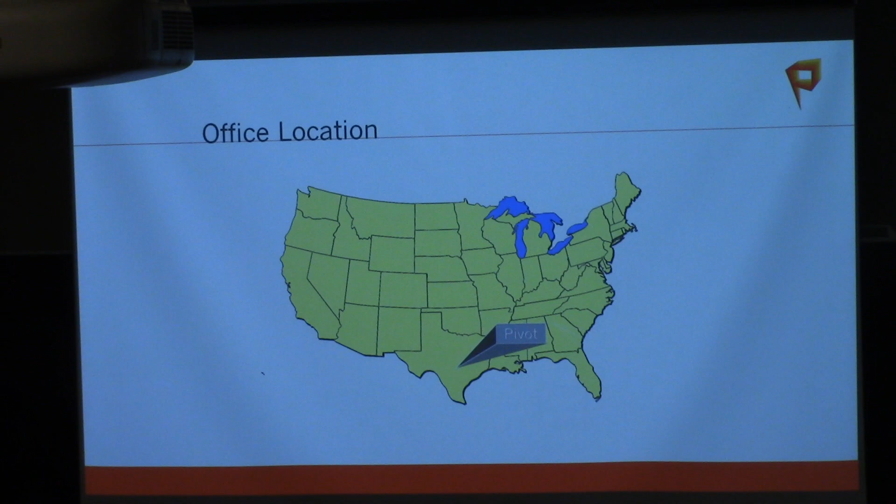Most people that know me know I do a lot in structural concrete, and I'm actually not going to talk about much concrete today. There will be a little bit on concrete, but given the work that I do as a consultant, I get involved in a lot of different things, some very interesting things, and I thought this one might be of interest to you. First, I want to give you a little bit of background about Pivot Engineers. It's a small firm. We have 13 individuals. Half of them are PhDs, the other half have master's degrees. We're located in Austin, Texas.

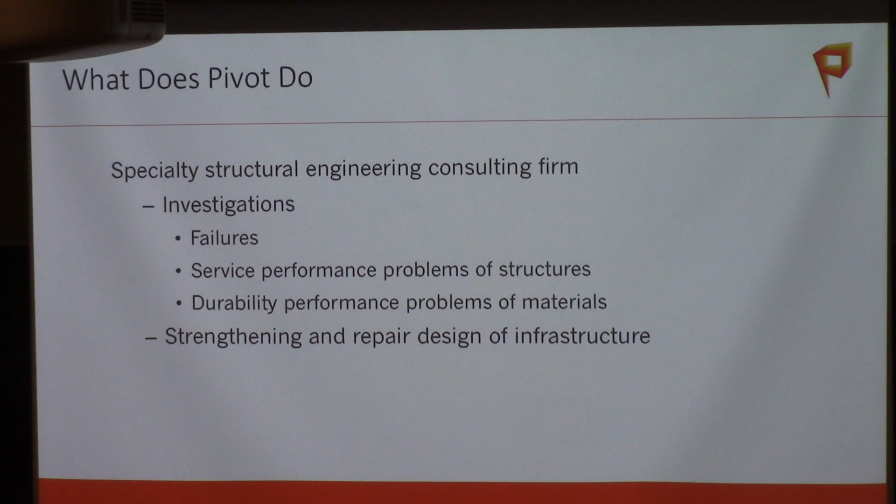I've been fortunate over my career to work in most states. I need to work on the upper Midwest here a little bit, as you can tell. Had a few projects outside the continental U.S., including Alaska and Hawaii, and done work in Honduras and in the Caribbean. We're a specialty consulting engineering firm, mainly doing two different types of work. One, investigations, looking at structural failures, performance problems with various types of structures, buildings, bridges, infrastructure of all types, durability. And one of my favorite opportunities in work is actually strengthening and repair design of infrastructure. That's the type of work that I enjoy best.

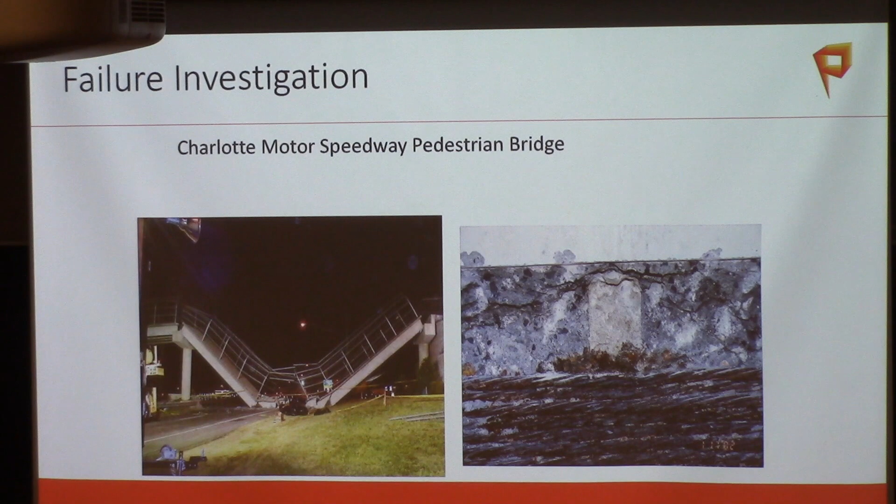In terms of failure investigations, this was a pedestrian bridge collapse at Charlotte Motor Speedway. 114 people were on that bridge when it collapsed, and it was unfortunate. It was all caused by a simple little detail at the precast yard where they filled the plug with chloride-laden grout, and you can imagine what chlorides do to pre-stressing strands. On that fateful night, luckily no one was killed, but some were seriously injured.

I got involved with TxDOT a number of years ago. I'm certainly not a vibration specialist, but we got involved in some cable stay bridges. There's two in TxDOT that both had what's referred to as rain vibration issues. When you see something like this, the first thing that comes to mind is fatigue of the pre-stressing strand that makes up the cable stay. And you can see it looks like, as I refer to it, a wet spaghetti noodle,

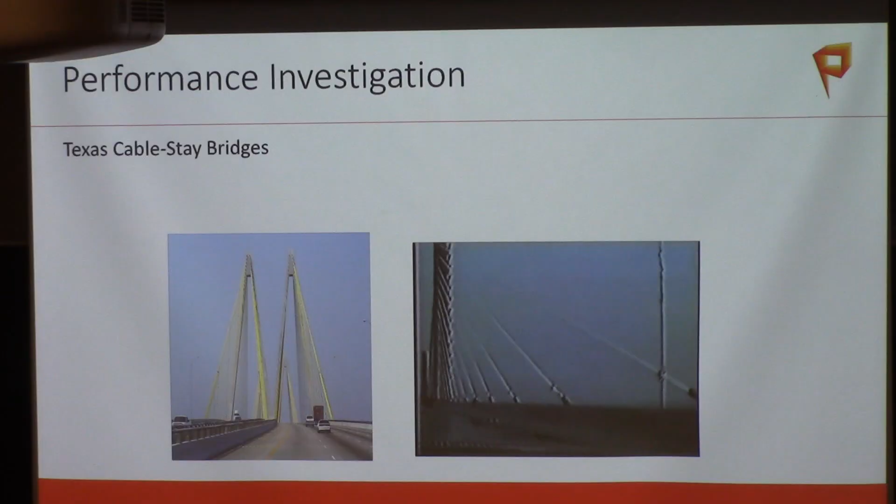the technical term. And that mechanism is hard to imagine, but when it rains and there's a light wind, it forms a rivulet, a little stream of water. You can physically see it, and that's enough to create asymmetry when the wind blows, and you get the vibration transfers from the wind.

Interestingly, as you can probably figure out, it's only a certain wind. If it winds very heavy, it blows the rivulet off, so you don't get vibration. So it's a very certain set of wind conditions where that occurs.

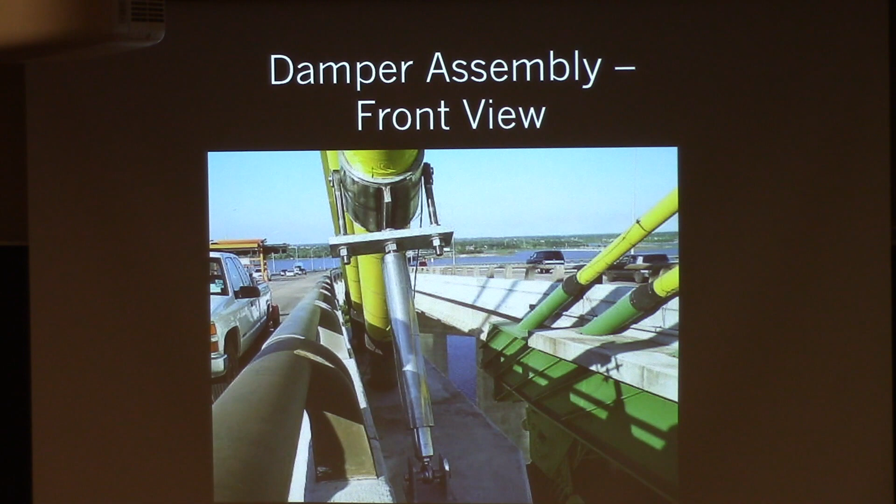We designed some dampers, we had a prototype damper. This is the final installation, which was in a very harsh environment in the Baytown refinery area outside Houston, so it's all stainless steel. This gives you an idea of the effect of the dampers, which was to reduce the vibration.

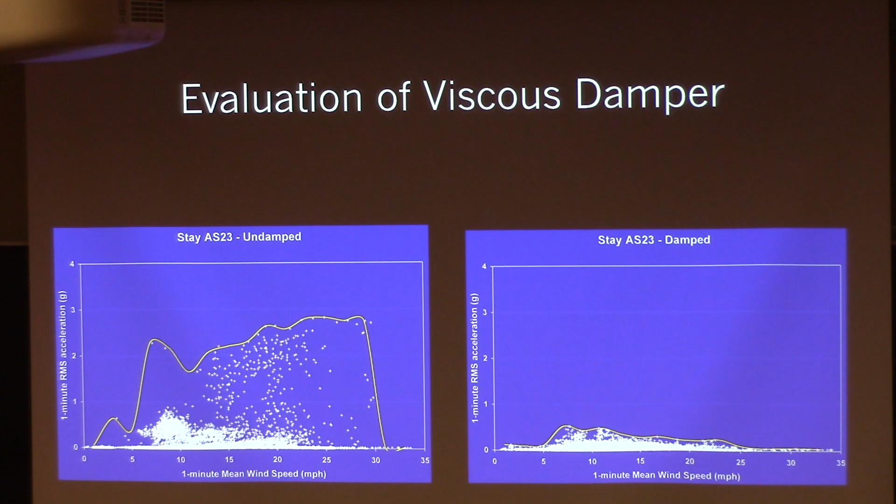We recently completed two bridges in Georgia. Both of them experience rain vibrations, have been in existence for 20 years, and they're doing the same thing. We're retrofitting them with dampers.

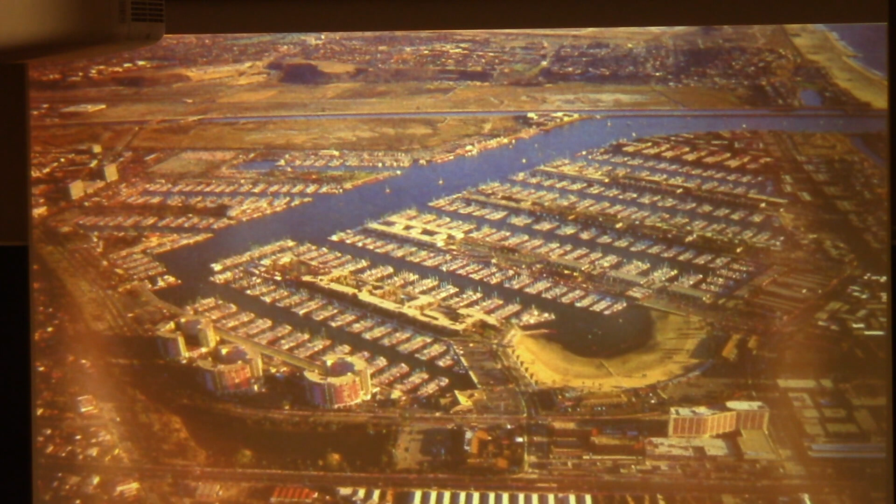This is one of my favorite projects of my career, quite old, done back in the mid to late 90s. It's the Marina del Rey seawall. It's a very simple structure, built in the late 1950s by the Corps of Engineers.

It started having corrosion problems along the joint. As you can imagine, in a marina, the water tide fluctuations twice a day ate at the reinforcing steel, creating corrosion problems. They started having collapses of this wall.

In the meantime, there's a lot of infrastructure, as you saw in the picture of Marina del Rey. Interestingly, LA County actually owns the land, and they rent it to people on long-term leases. It was very difficult to try to visualize something on the inside because of all the boats.

So we went with caissons that are really just vertical bending members and tie rods that were sunk through the back. We did a fair bit of non-destructive testing in order to locate where there was corrosion damage, mainly delaminations on the backside of the wall.

We were able to locate those and save about $25 million by doing the non-destructive work. We were able to tune or customize each of the wall panels depending on the amount of damage.

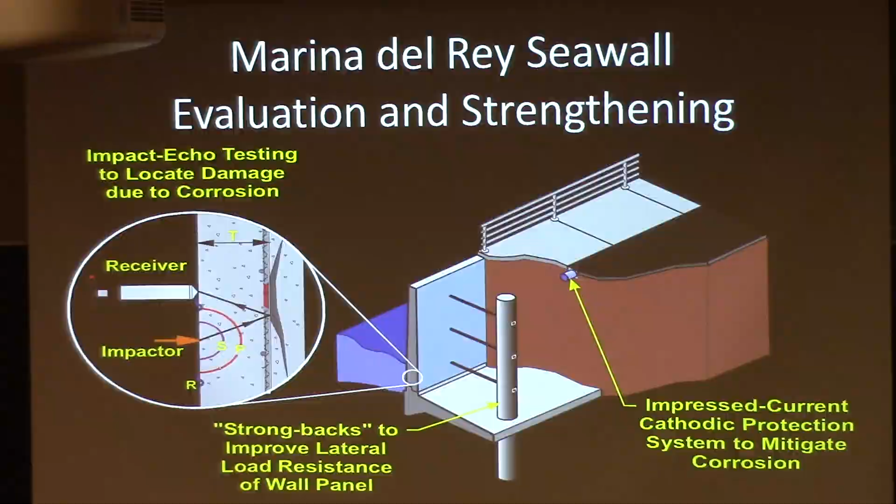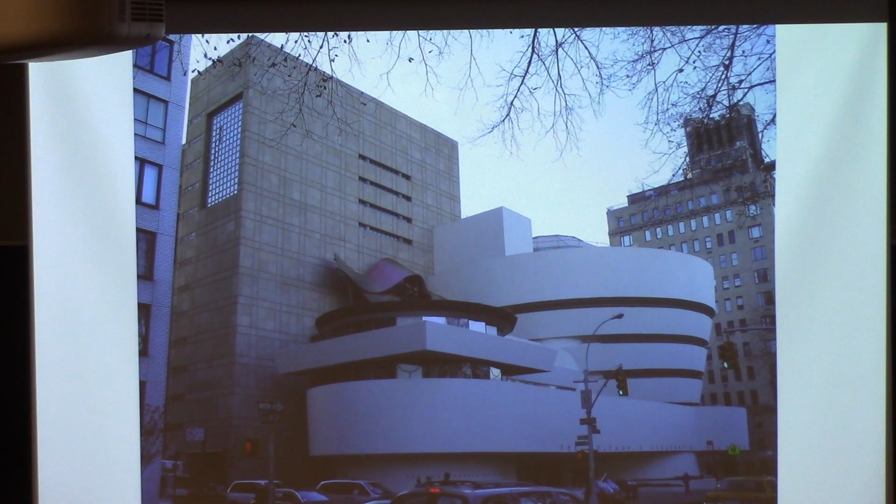Of course, Frank Lloyd Wright has a lot of ties to Indiana, with his architecture in Bloomington and other cities and towns across the state. You can see some of the problems it was having over the 50-plus years it had been in existence.

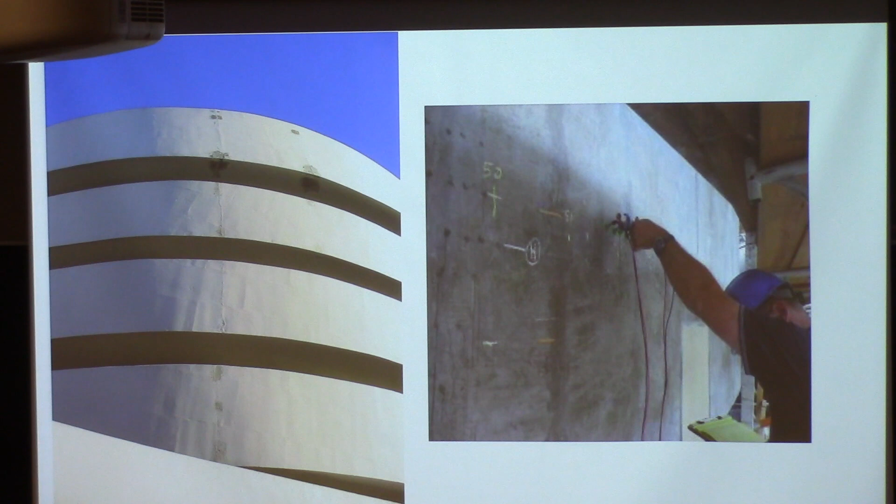We did some non-destructive testing, figured out where the corrosion was occurring and what we needed to do to mitigate future corrosion, and it went through a very extensive restoration process.

That's where the residents get to go walk their dogs — they don't want to take them outside, so they take them to the terrace on the 10th floor. A piece of concrete about 60 pounds fell and exploded next to one of the maintenance people for the building.

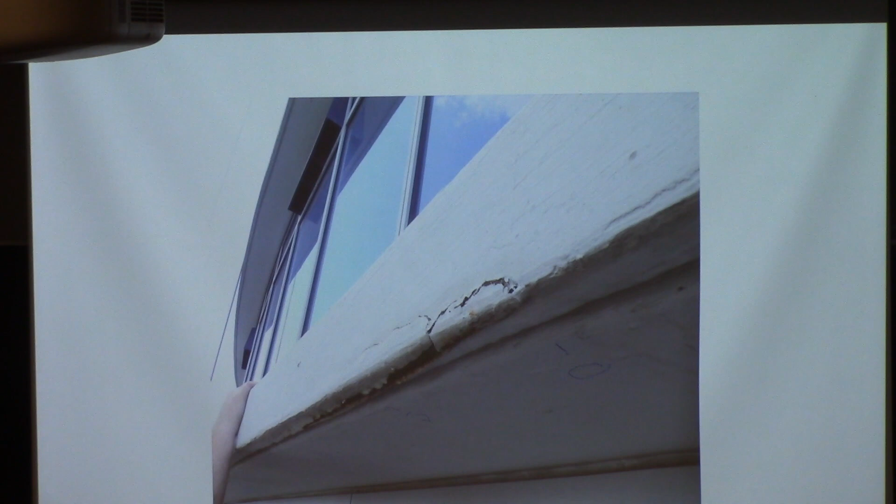It was 6 years old when it was first discovered; it's 9 years old now. We went through an extensive investigation and corrosion investigation process, and it was all in the detail.

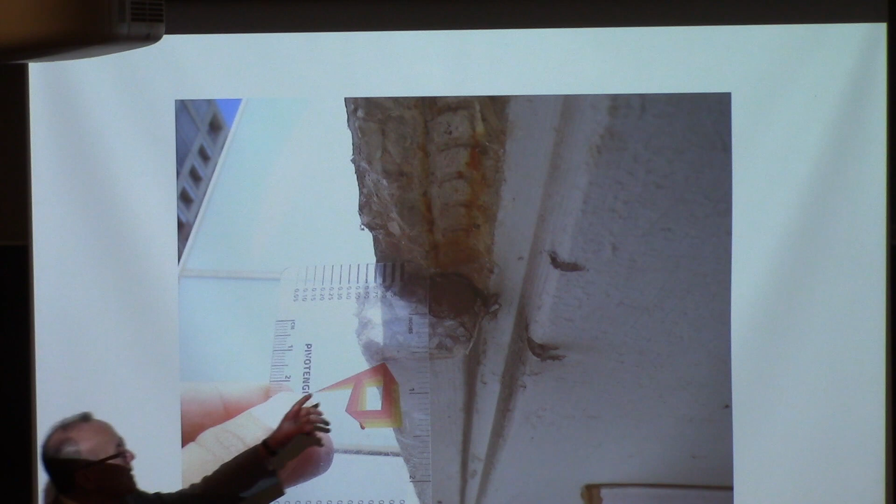A reinforcing bar, you can see here, was placed at this edge near a drip edge, and there are no salts anywhere nearby. It was carbonation corrosion, and it occurred within Austin, Texas — what I consider a very mild environment.

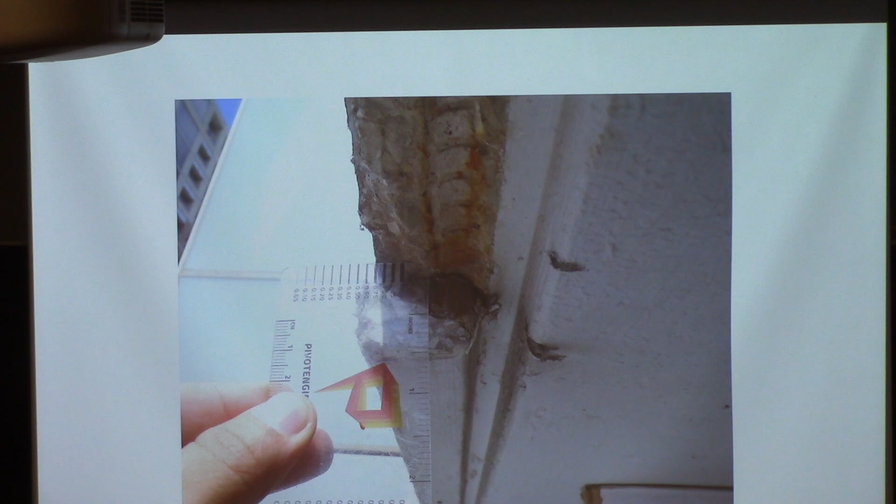Then we're retrofitting it, extending the slab edge out by 2 inches from what it originally was, using GFRP bars, an inert fiber reinforced plastic. You can see what the repair looks like once it's finished.

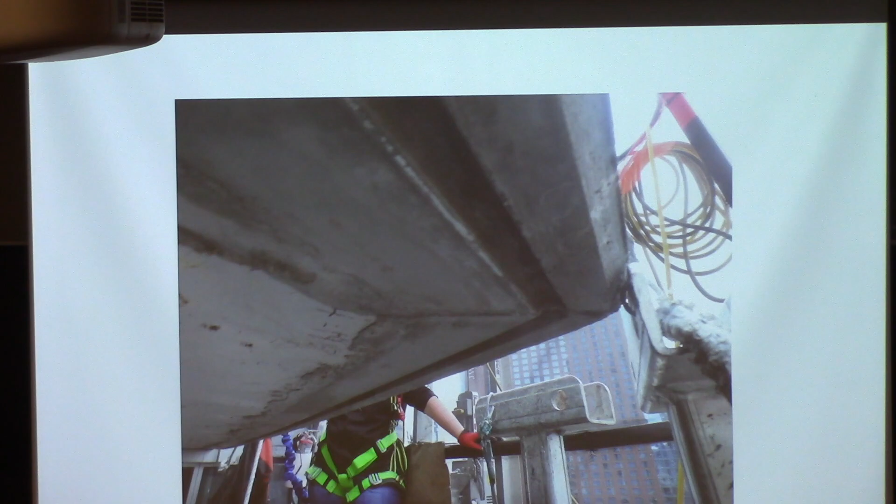So that's a little bit about our background, the type of work we do.

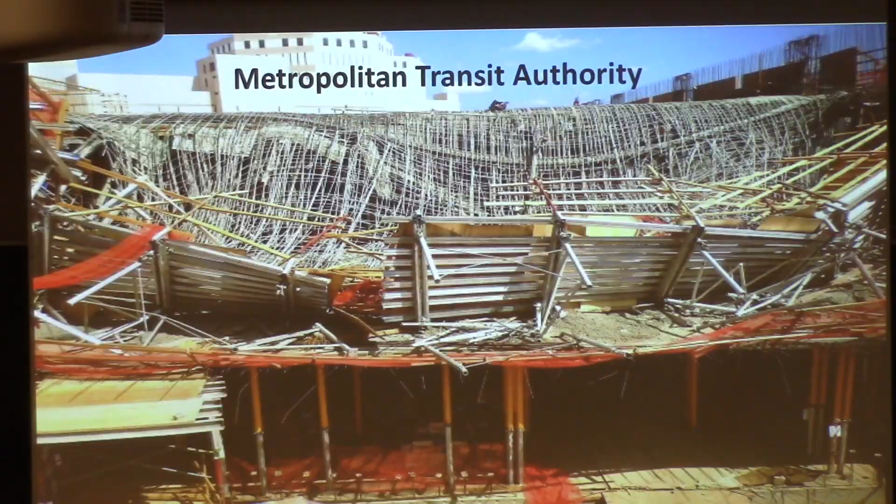Luckily, a couple of workers rode the collapse down. They were not hurt or injured, which was fortunate. Here's a view over the top of this failure.

Something like this happens, particularly for a public works project, and a lot happens very quickly. The contractor who retained us first needed to keep moving on the construction, which was our first task. In the meantime, we had to salvage what we could for a collapse investigation to figure out what happened, so we make sure we don't repeat it.

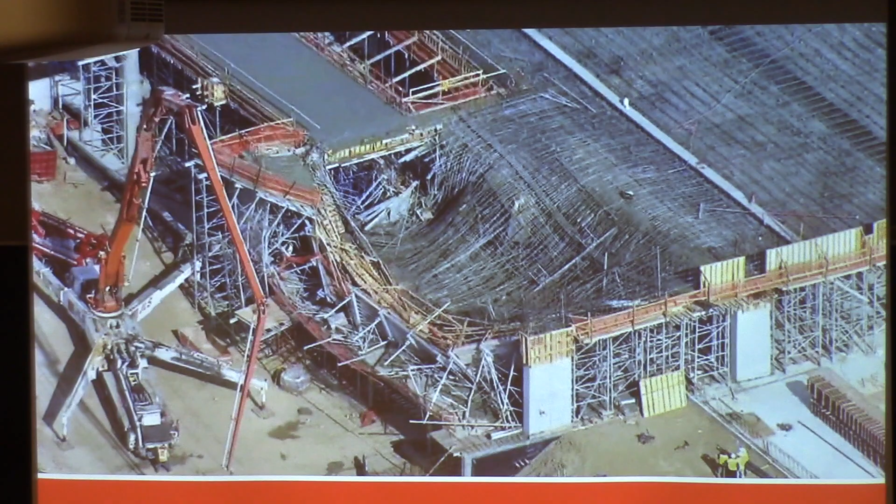So we first addressed the collapse and the repair of the damage. They wanted to keep moving forward. There was a question about the adequacy of the slab that all this debris fell onto, and what its load carrying capacity was. We needed to determine the cause of the collapse, and we tested the capacity of the actual shoring system, because something came out during our initial investigations that made us think there was an issue.

So once this collapse occurs, we're working in two different modes. We're trying to investigate what caused the collapse and how we're going to review it, while work continues. We had to come up with and design repairs, do additional concrete placements. They were up on the third floor of this big facility where these buses are maintained, so we had to keep moving along the repair process as we were doing the investigation. There was quite a bit of work going on at one time.

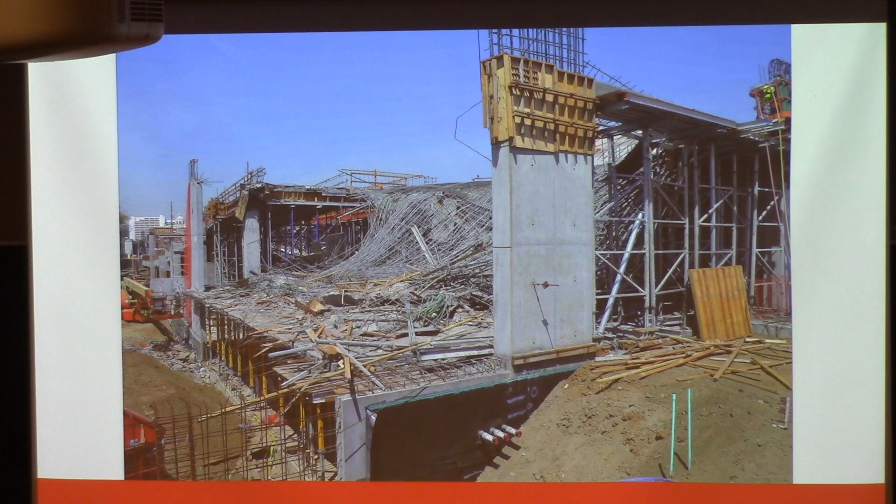Here's another look—you can see some of the formwork still in place on the shear walls. There was a pour strip that had not been cast, but you can see the amount of reinforcement. It's actually a post-tension slab on top of that, which had not been stressed yet. The cables all ended up having to be removed from the portion that collapsed, but in portions that did not collapse, we ended up having to do repairs.

The first thing we do is clean up, and usually in a collapse investigation you want to do triage and figure out what triggered the collapse. There were 16 inches of fresh concrete slab that came crashing down on the slab below, and what do you do? You have to remove it. There's really not a lot you can do—things are entombed. You've got pieces of the formwork and shoring system entombed in this concrete.

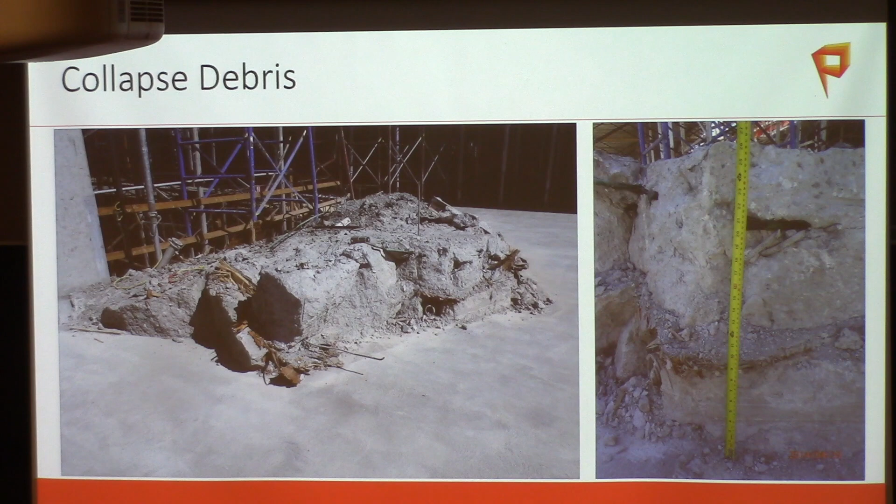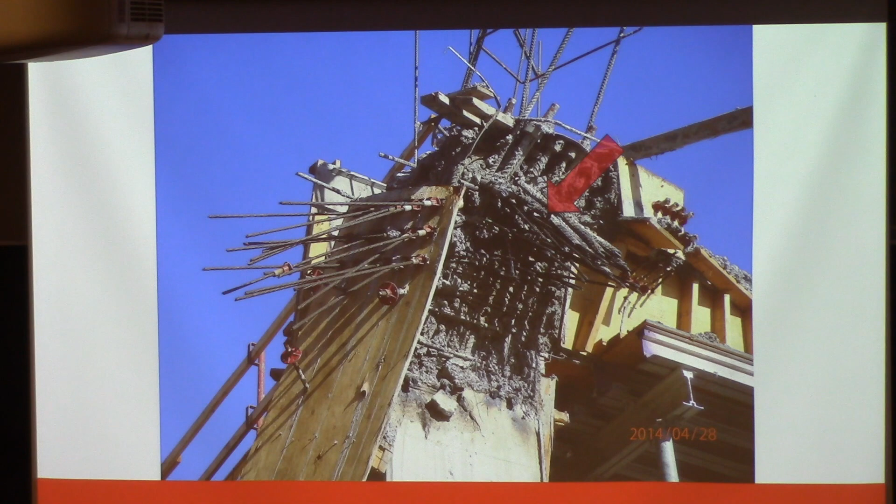Here's the condition of one of the columns. You can see it's post-tensioned in one direction, so first things first, we had to come up with repair details to get that column and the shear wall fixed.

So this is after the collapse—this is a portion of the collapsed placement that we replaced. There are two girders along the edge that are continuous across the construction joint, which we had to deal with—how do we repair that and make sure we can effectively have post-tensioning in those beams?

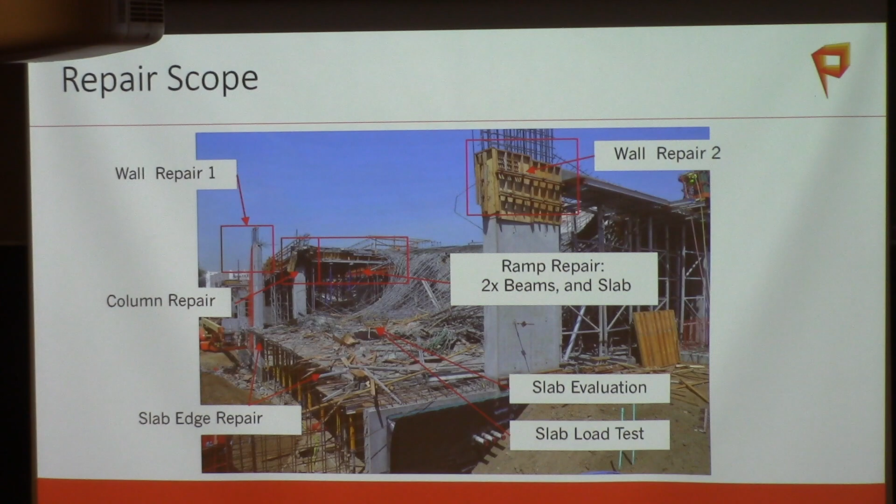This ramp slab was a previous placement and for the most part was not damaged during the collapse. So we had various wall repairs, a column repair, a slab edge repair, and all this debris—this slab here was the one the owner was worried about and needed to be evaluated, because of the concern it may also have been affected by the collapse.

We came up with a detail. With the columns, we had to couple the vertical bars. We had to go down and remove all the damaged concrete, then simply use couplers with headed bars up at the top to make sure we could develop the steel.

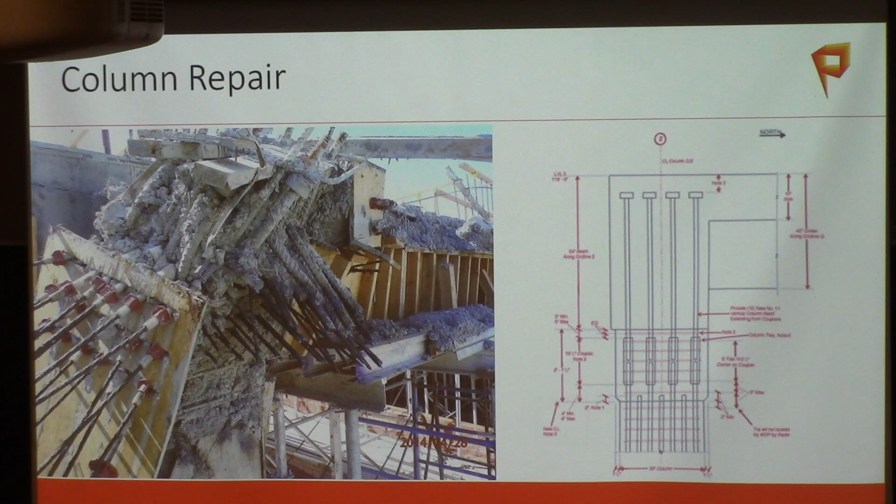The only thing we really had to do differently is we didn't have enough concrete cover by code to make it the same size. So you can see at the top of that column it has a slightly bigger dimension in order to make the concrete cover work out. That was really all the compromise we had to make in that column repair.

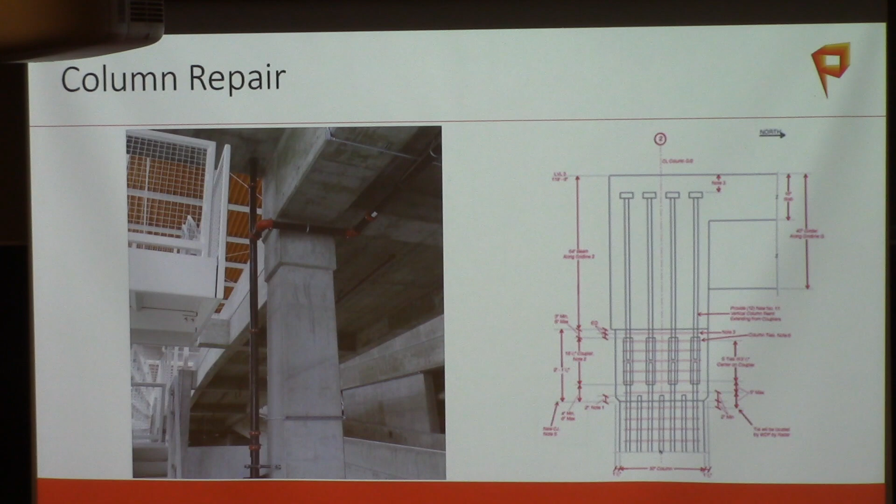You get thrown out here, and the contractor has, I think he said, 25,000 pieces of this formwork system out there that he's going to continue working on building. So the question was, should we be doing that with this particular formwork and shoring system? Well, the answer for us was, for the part that we were going to replace, no.

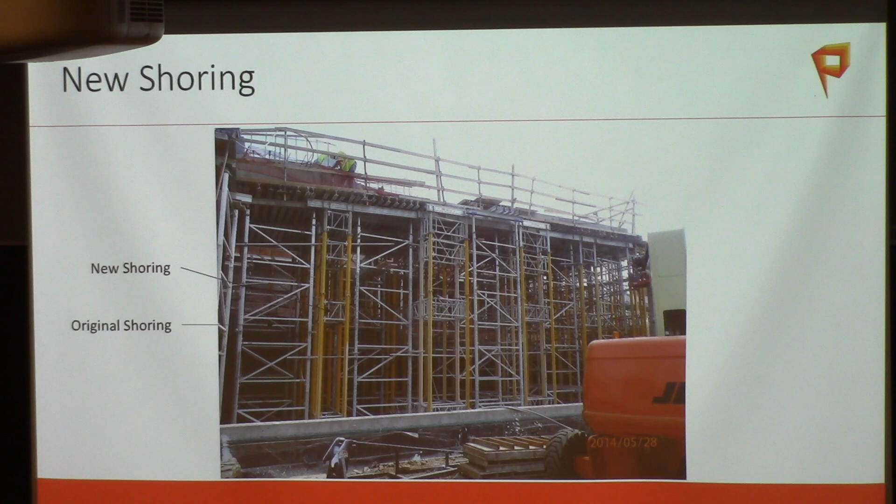This was the original shoring system. It's aluminum, this is aluminum too. It's a system out of, I believe, either the Netherlands or Sweden, I can't remember, but very robust. You can see all that, and as engineers, once you see a failure, we're not going to take any chances.

It was a very robust shoring that we put up under the slab we needed to replace. Those post-tension beams that straddled along those ramps, we had to basically thread, cut, and couple the post-tension tendons in. Luckily, the beam in the portion already poured in the ramp had intermediate anchors, and these anchors still had the pre-stressing force, so all we really had to do was cut those strands. We had to do it in different locations because you can't put all the couplers in one location, it wouldn't fit, so we staggered those out in the beams.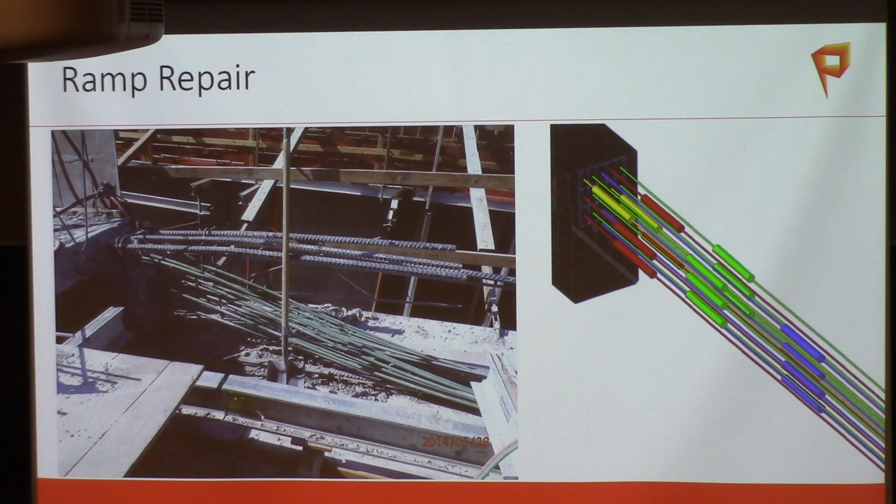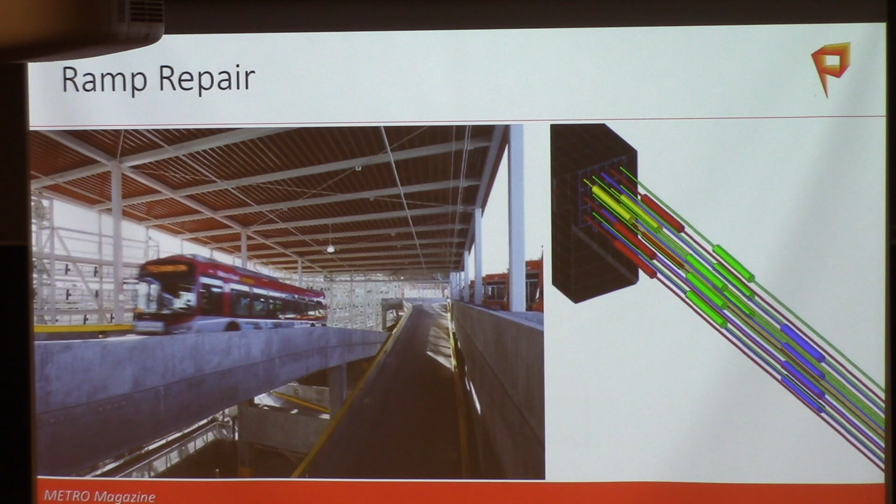You can see the tendons laying there before coupling them and rethreading them to pour the next cast of the beam. They eventually built a cover over the slab. This was all rebuilt, and you see buses operating on it, with no problem.

So back to that question about what do we do. The contractor wants to continue because they're renting this formwork system, and you'll see very quickly we knew there was an issue with some bracing in this system. Not sure exactly what the problem was, but we were fearful that we were going to repeat it.

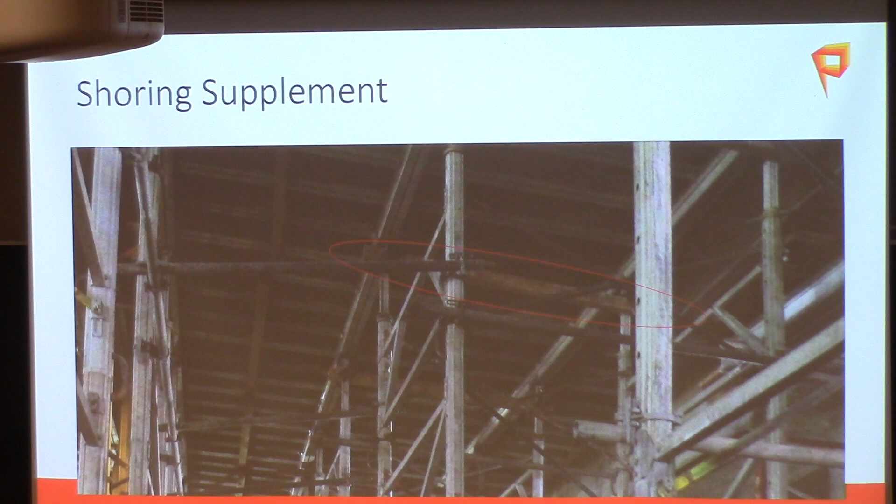So we wanted to make sure with the bracing, we went out and said we're going to have to put some additional braces up. The simplest thing for us to do was get 6x6 pieces of timber and lock those into the aluminum post, cutting down, in essence, the buckling length of that column. There was more good lumber wasted on braces than I've ever seen in my life, just saw cutting this thing in order to put it up. It's a shame, but it was the quickest and easiest thing for us to do.

You can see down here where we were supplementing some of the bracing. You'll figure out why we ended up doing this as we go through the rest of the presentation.

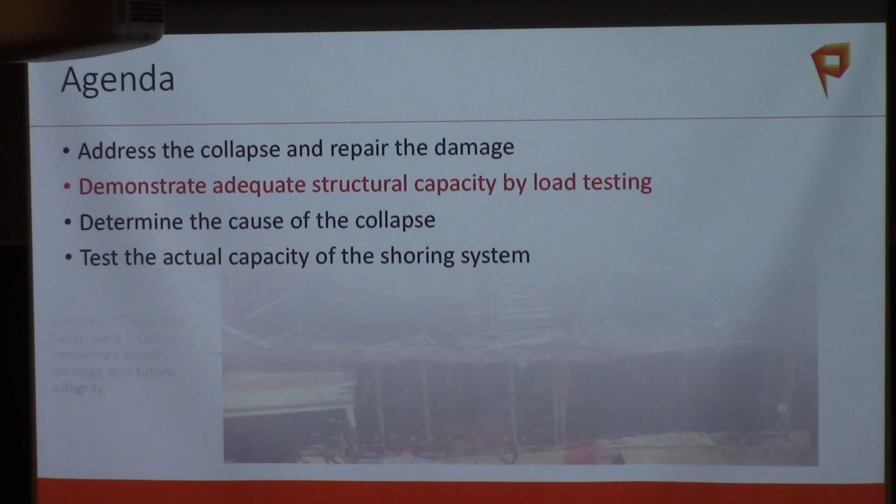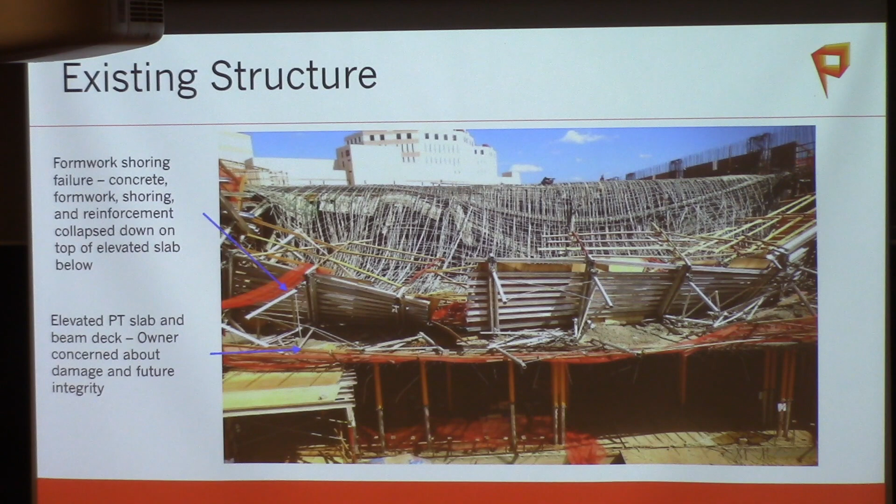We wanted to demonstrate the adequacy of the slab that all this debris came down on, where the formwork came down. We told our client, who tried to tell the owner, we can do that using non-destructive testing, and we're quite confident of it. We went and did impact echo testing and were able to demonstrate that the concrete was solid everywhere. We did not see any concrete in this post-tension slab that even remotely suggested there was any problem.

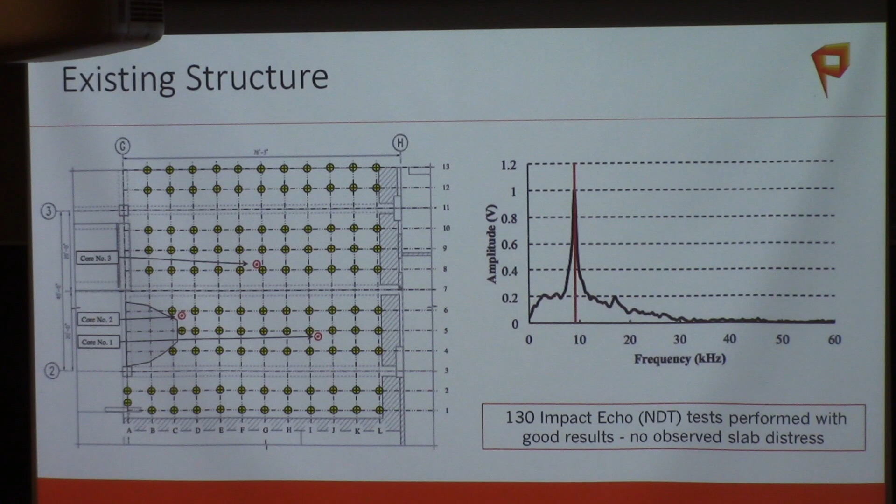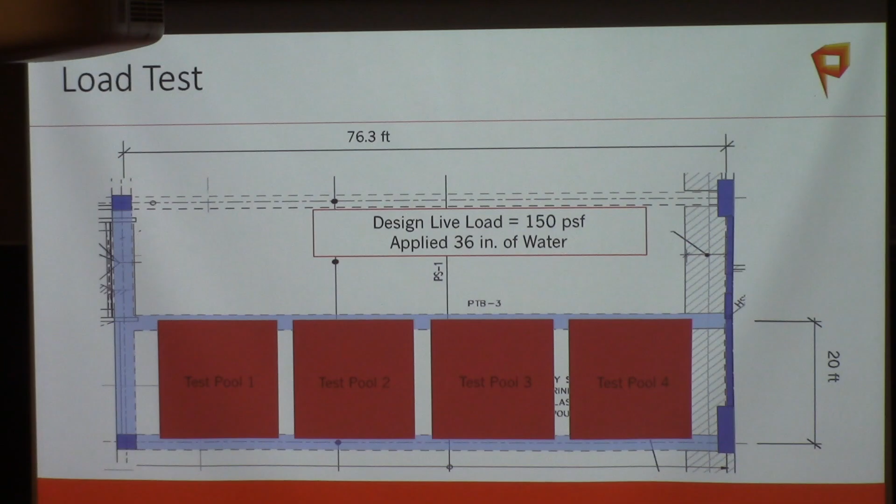That wasn't good enough, they wanted us to load test it, so we did. This is the area that we tested, where most of the debris had fallen. We basically used pools of water. Design live load was 150 PSF, and we did an ACI load test, which is 85% of 1.2 dead plus 1.6 live, working out to about 36 inches of water. There's our test pools up on top.

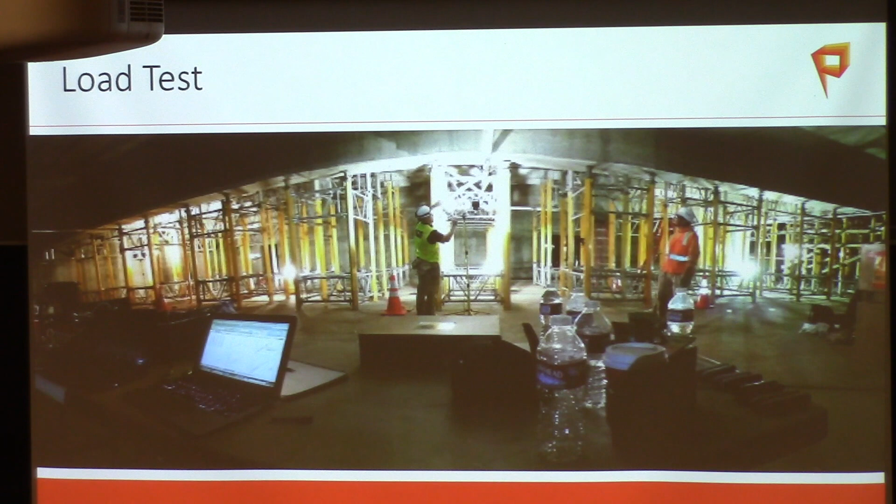It's always very difficult to make sure you keep water in the right location. This is underneath, where of course we're instrumenting, you have to monitor deflections as you apply load. Of course, the shoring isn't there to support any load, it was there just in case something went wrong. We had the shoring in place in case anything were to happen, which we didn't believe would, but in a load test you certainly want to be safe. This was the load or displacement time response, per ACI.

It's in the old chapter 20, now in chapter 27. The maximum deflection and the residual deflection, the best we can tell, we've gone through and looked through the literature. There's a new load test procedure that's put out by the 437 committee. We wanted to find out where this had come from. People went back and looked, and it's like, where the heck is this? The best we can tell is it came from Mete Sozen. And no one knows where these numbers are or how these coefficients fit, but we still use it.

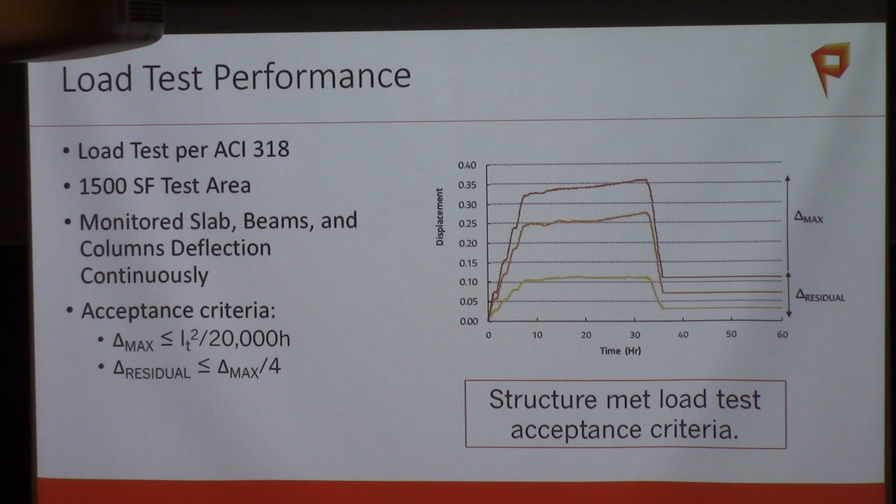It still works, and so we ran the load test, and as we anticipated, the structure met the load test and the acceptance criteria, so there was no problem. So now we need to determine the cause of the collapse. That's less important for the contractor, who was now moving forward with the repairs and doing what they needed to do, but there's a cost involved.

As you can imagine, the contractor lost time. Time is money. There were liquidated damages associated with finishing the job on time. All those kinds of things that in real construction projects you've got to be cognizant of. So we need to determine the cause of the collapse. Who's culpable for this? Did the contractor make a mistake? Did the designer make the mistake? Or exactly what happened?

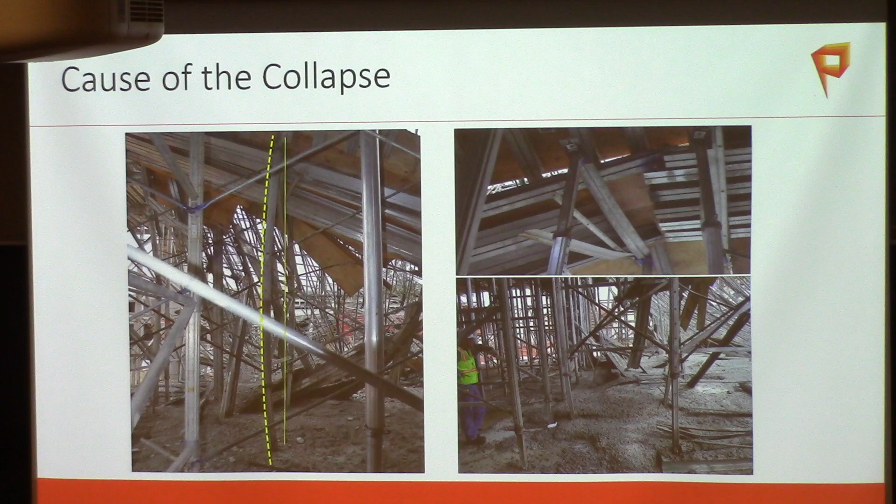So we really could not get very close to the debris. It was not all that safe, but there were a number of places where we could kind of get a hint of what was going on. Here's some photographs, and one of the things you see, of course, is the post of the formwork tower, and you can see it's in a bowed shape, bottom foot encapsulated in concrete. So it certainly gave us an idea that there could potentially be some stability issues.

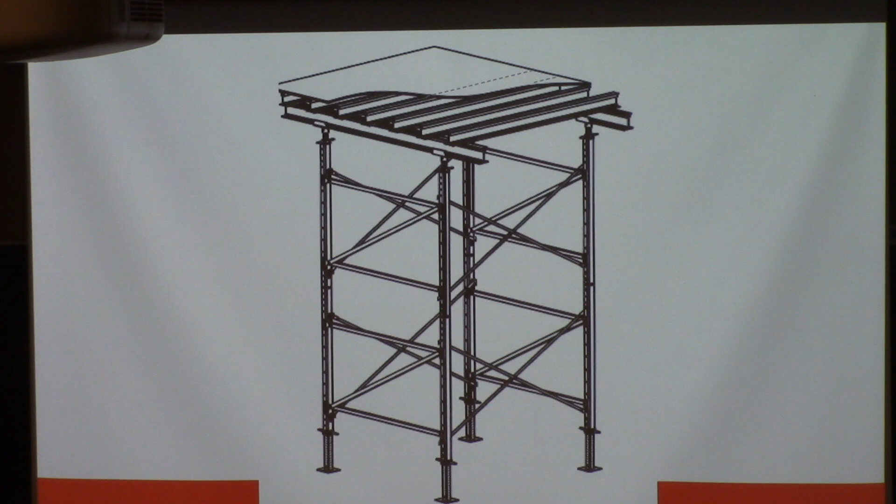So here's the basic tower frame that goes up. You have your plywood deck. It's supported by these aluminum beams that transfer load over to aluminum stringers. Those stringers load the post, and of course the post delivers the load down to ground. Here's the beam section, and here's the stringer section. You can see they put a little piece of wood up there. That's for nailing the plywood decking into the system.

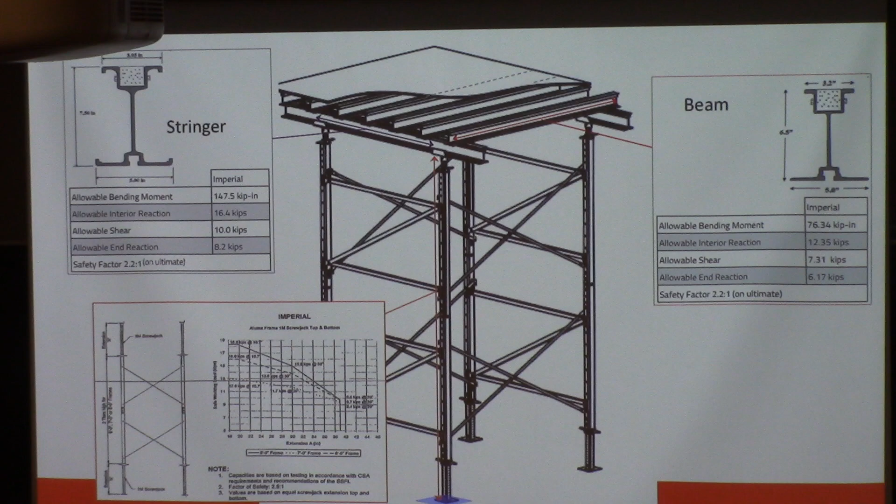And the design for that formwork is done based on this design graph provided by the manufacturer of this system. It doesn't note it on this photograph, but it says you can do up to 3 towers, 1, 2, or a third one, and still use the same design charts. Factor of safety is 2.5. It says it's based on testing in accordance with CSA, and that's a Canadian standard, apparently, and recommendations of the Scaffolding, Shoring and Forming Institute.

So you have various design charts, one for the stringer. Of course, the stringer, they test it, but it's just tested in a machine under basically 4-point bending, as you can see here. And you've got a very large capacity. It's never really going to be governed by that, but they have design charts to make sure you can carry your load from your beams to your stringers, and your stringers can deliver the load to the post.

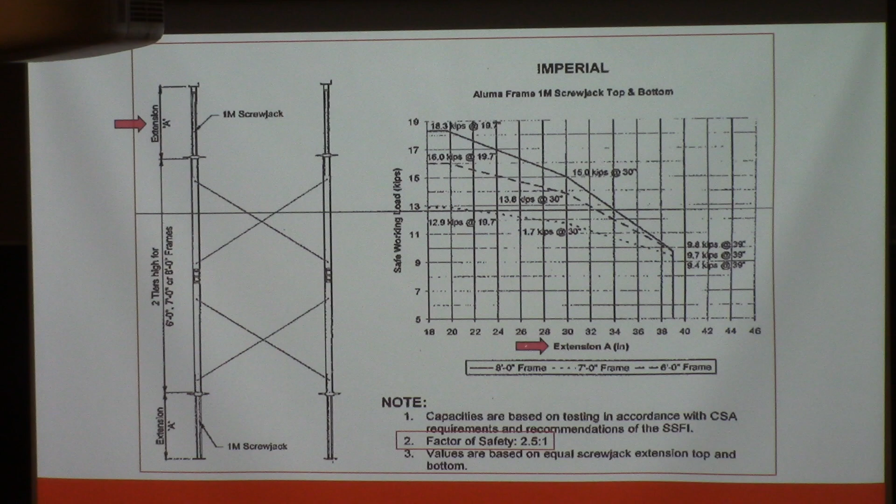And the thing to note on these posts is there's a screw jack, and those can go anywhere from 18 inches up to 39 inches. 39 inches is about 1 meter, so that's where they came up with that. And so you've got the design chart. They vary only because of whether it's a 6-foot frame, a 7-foot frame, or an 8-foot frame. And so they have different capacities.

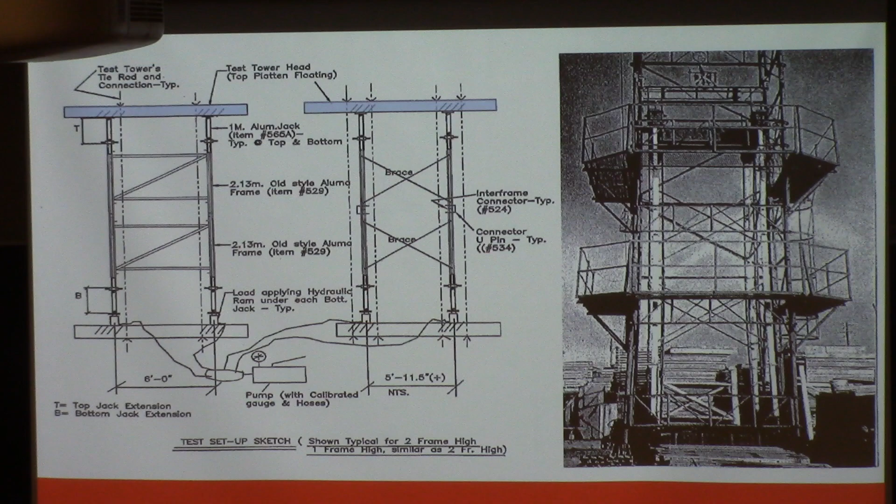And so what we were able to find, through the incredible searching we can do these days with Google, we found an old test frame where this company had tested this shoring tower, and this is another picture that we were able to find. And so the interesting thing is how they load the post in this frame. They essentially have a stiff tower head loading that post, and then that's how they develop the design charts.

So that is kind of the way the frame was tested by the manufacturer of the shoring system. And when you have the stringer loading across there, you can't just take that stringer and put it on this and say that that's what you get.

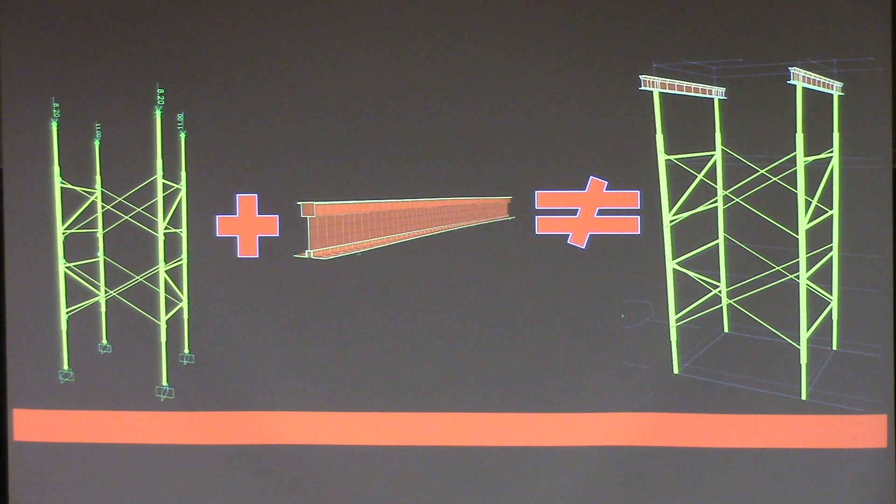That's the equivalent load over there. You're not testing the system. You're only testing the tower frame that makes up the system. And there's a big difference that we will see. And most all my steel colleagues in here knew the answer to this before I ever got to it.

But with the fact that you put the stringer up there on top of that connection sitting on top, that's a classic stability problem in steel. If you have a girder or beam going over a post and it's not connected directly into the column, you get a destabilizing effect at that location. In essence, that beam or that stringer wants to roll or deflect, and when it does, you actually introduce other forces that the system was not designed for.

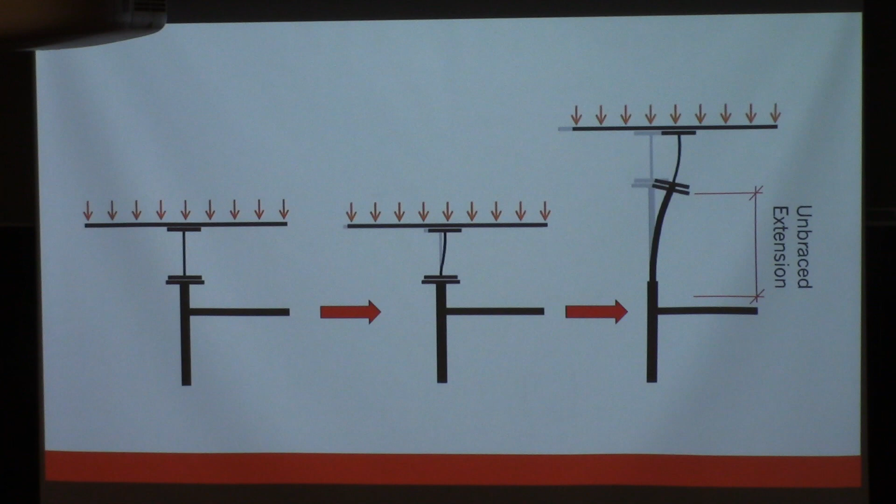So this is just another kind of pictorial of how it wants to behave, because there's nothing to keep that from laterally moving up there. Again, those are the screw jacks, and they could go all the way up to 36 inches. And this is just a simplistic way that the manufacturer, if they wanted to put out appropriate design charts, could go to a simple little model where you put in a hinge and go through some basic statics and determine the equivalent load based on developing an equivalent K factor for that particular post.

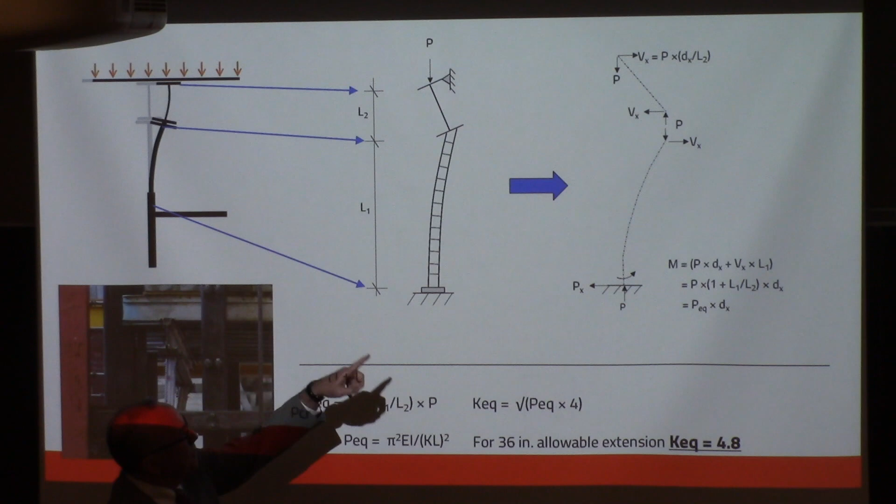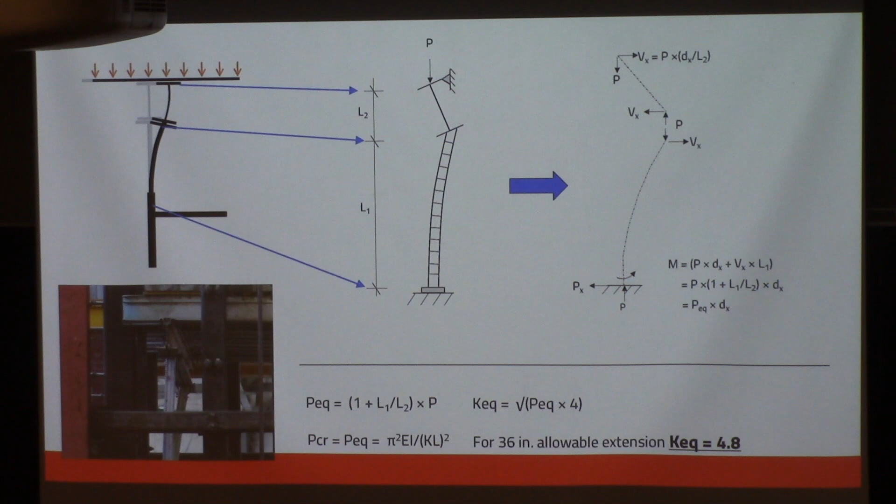And we did that initially. So instead of having a K of 1 with that hinge in there, for 36 inches you get an equivalent K of 4.8. And you square the value, with KL squared, you're going to be toast pretty quickly. This is very conservative, but it at least gave us a feeling of what the issue was. And then we had to do something a little more formal. This is just the same model looking at how the equivalent K varies as a function of that screw jack extension.

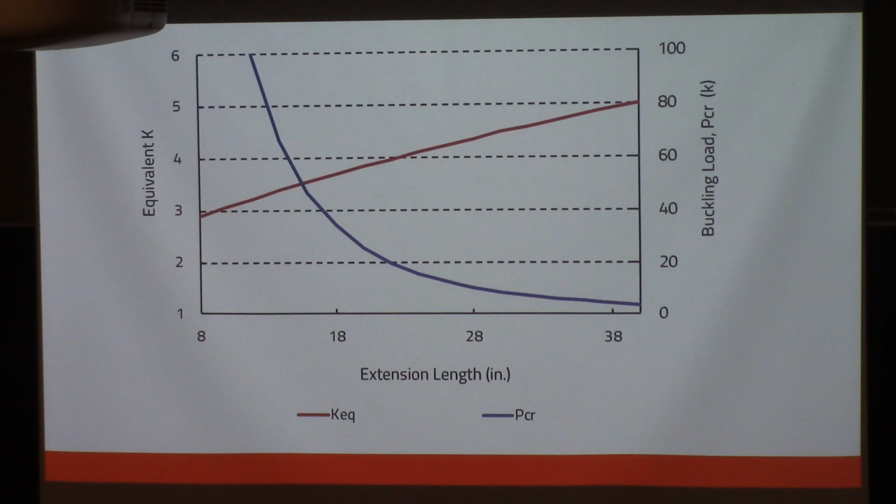So, of course, the next thing you do is a finite element analysis, what everybody does. The big problem there is you don't know what the boundary conditions are. Is there some rotational restraint when you've got those beams going over the stringers? Is there some friction along there with the deck acting as a diaphragm? So depending on what you use for your degrees of freedom, we got analysis results anywhere from 30% to 80% of what was theoretically shown on those design charts.

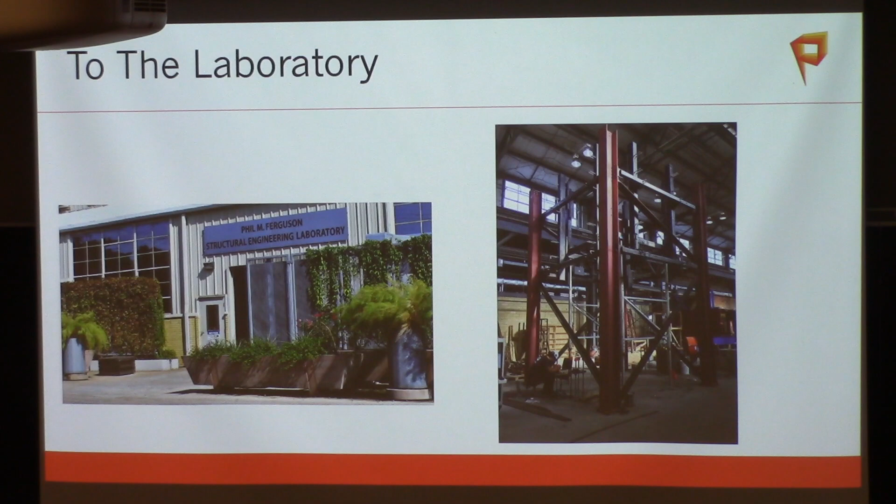So what do we do as engineers? We want to test it because we don't know. This ended up being a several million dollar issue for somebody, and we're lucky to have a laboratory in Austin, Ferguson Structural Engineering Laboratory. Our client was good about it. They had another job going on at Stanford University using exactly the same system. So they went in one night, stole a bunch of pieces for us, shipped them by truck down to Austin, and we were able to fabricate those frames.

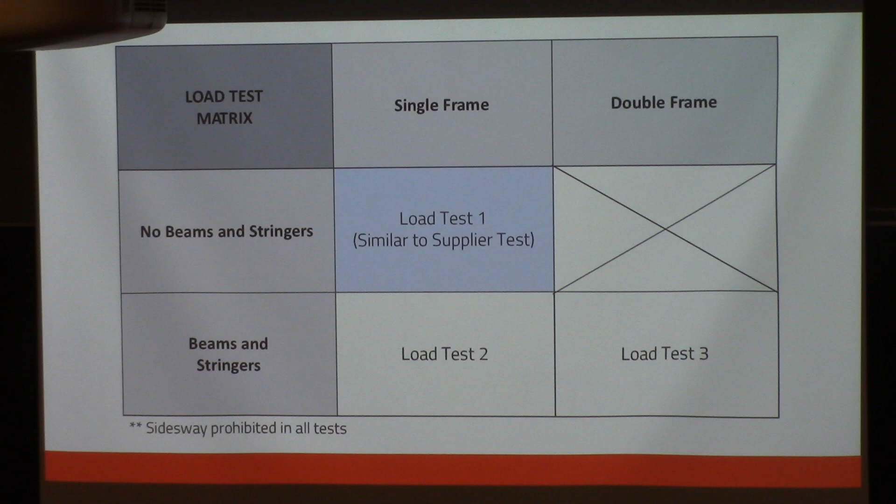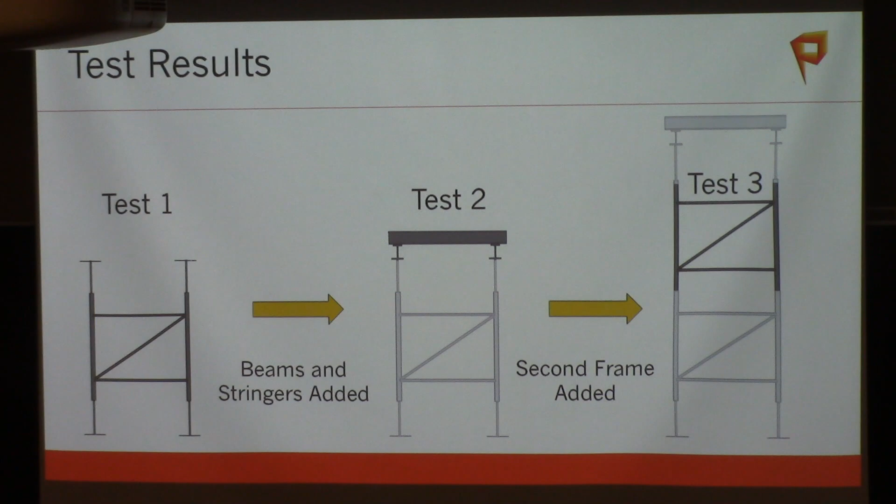We did 3 tests. We did one similar to what the supplier did. We then did load test 2, where we had just a single frame, and then one test with a double frame. So these are the 3 different tests. One, where I'll show you how we loaded, made sure we got load directly in without any rotation. Test 2 included those beams and stringers in the actual system design. Test 3 is with the double system.

So here's test 1. You can see we have a box beam that's welded and it's loading directly on that saddle at the top of the post. So we're making sure there's essentially no rotation in that loading head. Test 2 included those aluminum beams to the stringers. The loads are delivered from the stringers to the saddle to the extension part of the post.

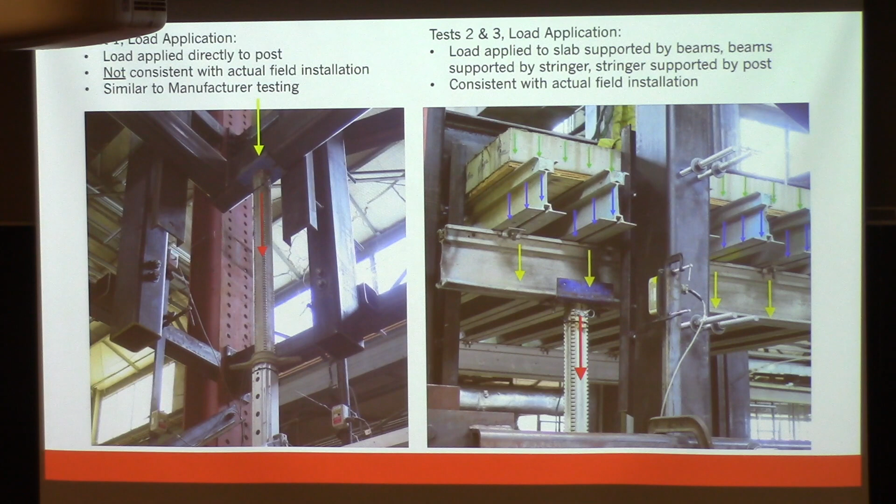We had plywood up there, and we didn't want to pour concrete, but actually this was Mike Englehart's idea. It was a really clever idea. We took a pre-tensioned concrete slab and cut it through the middle, and then used it as part of the loading frame. The reason he cut it in the middle is so that you got rotation across there, so we could say safely that the slab wasn't contributing to any load distribution in the frame. They had some precast pre-tensioned panels out there that they just cut right down the middle.

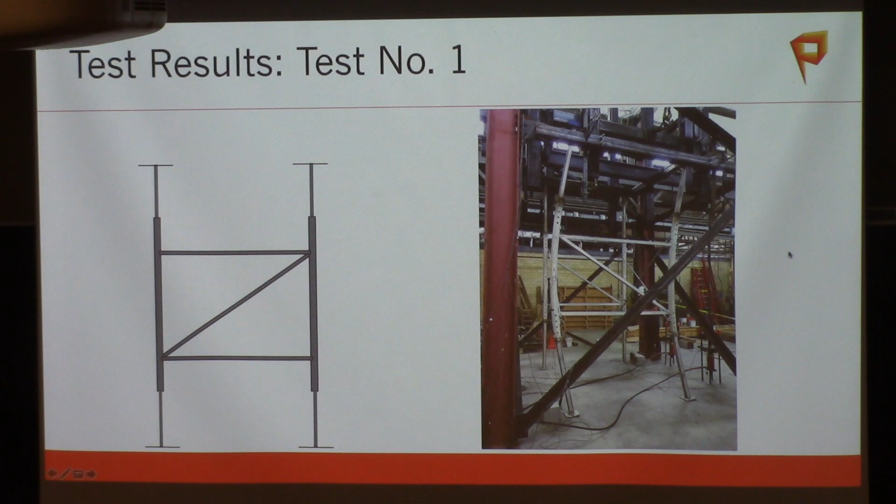So this is test number 1, and you can see this is the result, the buckled shape.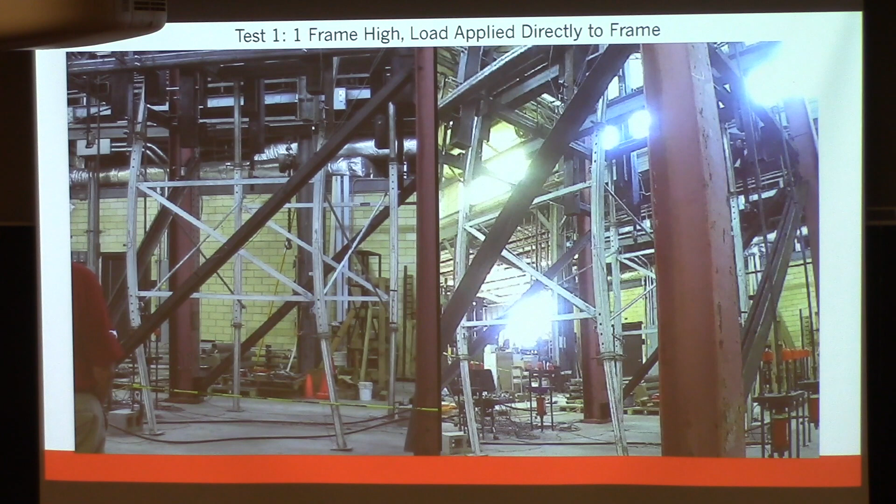So that's the first test, which is the one directly applied to the load frame, which was what the manufacturer indicated in his test results. So you have the manufacturer's ultimate data. Here's their allowable. That's the safety factor of 2.5.

Our load, we monitored some displacements laterally, what was happening. Don't need to look at those too much, but basically the load got very close to what the manufacturer's data was. The design chart said for ultimate 24.3 kips per leg. The failure load was 23.3 kips per leg, so it was 96% of the manufacturer's ultimate. That's a pretty good test in my mind, certainly for experimental work.

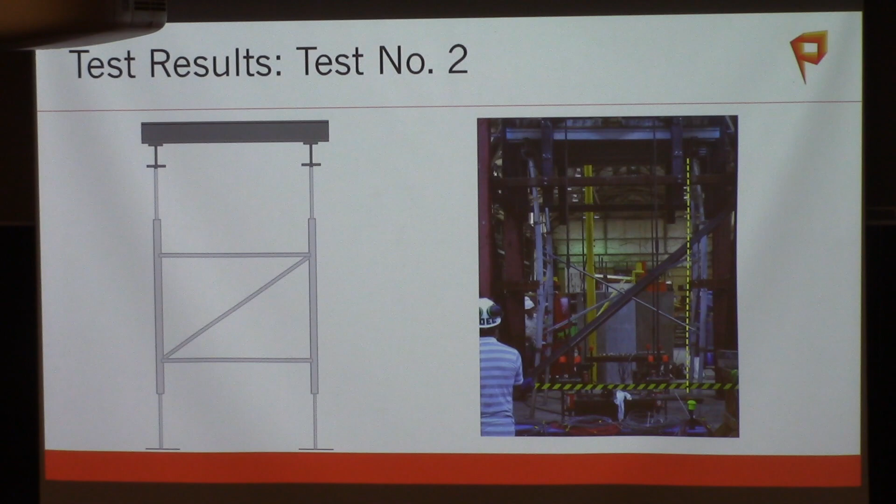So next, we went to the frames where we're now using the system. We got the beams on the stringers on top of the frame.

Now all I have to do is find my cursor. It's over on the right, just go left with it. There, you'll see it. Oh. Why am I missing it? It's a little panel. Yeah. Oh. Look at the front screen. Look at the screen right now. It's on the orange column. Oh. Why is it not on my screen like that? So, I'm sorry. Thank you. Thanks so much. I appreciate that.

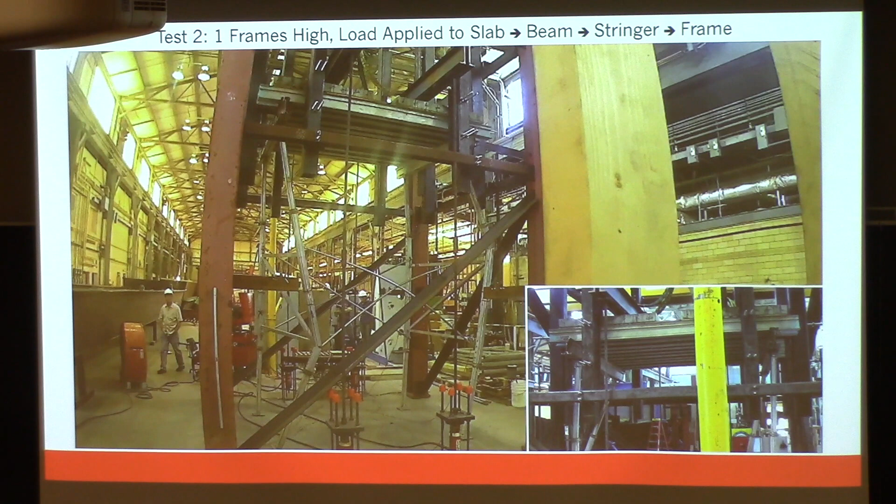Okay, so this is the one-story frame essentially, but with the... well, there it is. Now click on it and see. There we go. Notice how much Monster energy drink they've had before. They're hyped up, moving around. Graduate students moving around pretty fast. So we can see Dr. Hellwig walking around there, making sure everybody's safe, got their hard hats on.

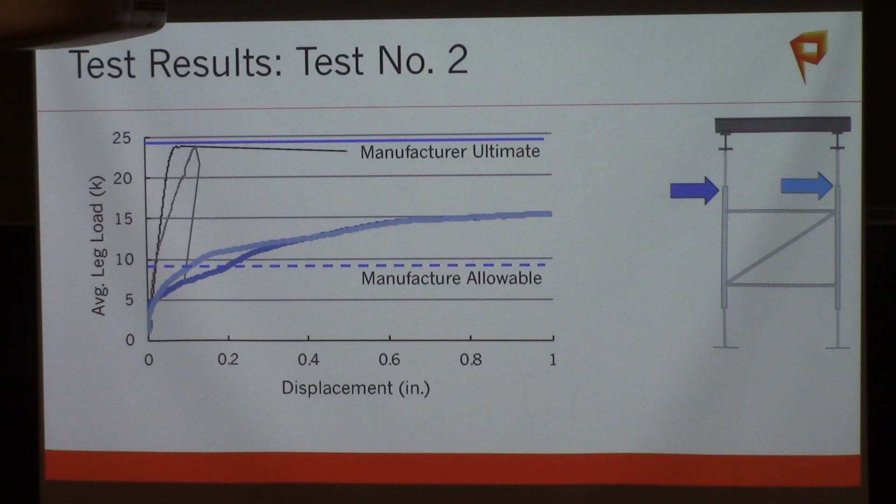And so here we go. We start to piece together. Now we see, just by virtue of putting those beams and stringers on, now the load is substantially reduced from what the manufacturer indicates in his design charts. And in fact, we're down to almost 40% reduction. We're about 62% of the manufacturer's ultimate, and the reduction is about 36% from load test 1, but it's more or less 40%.

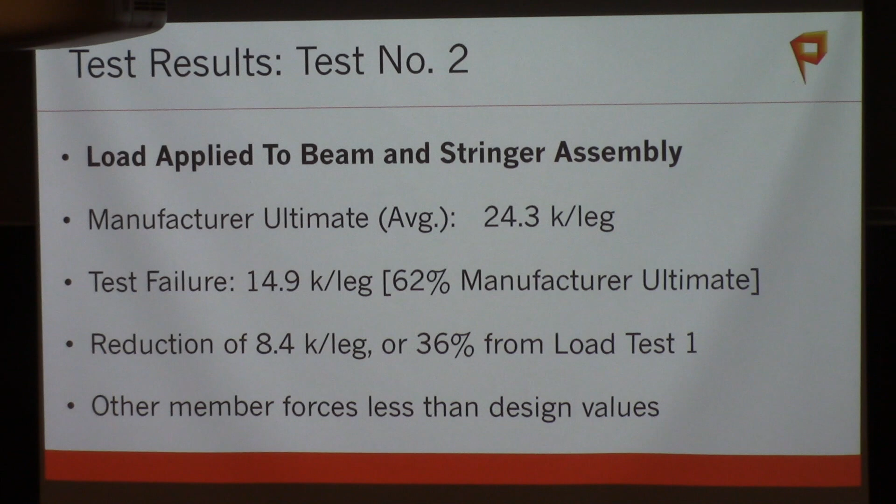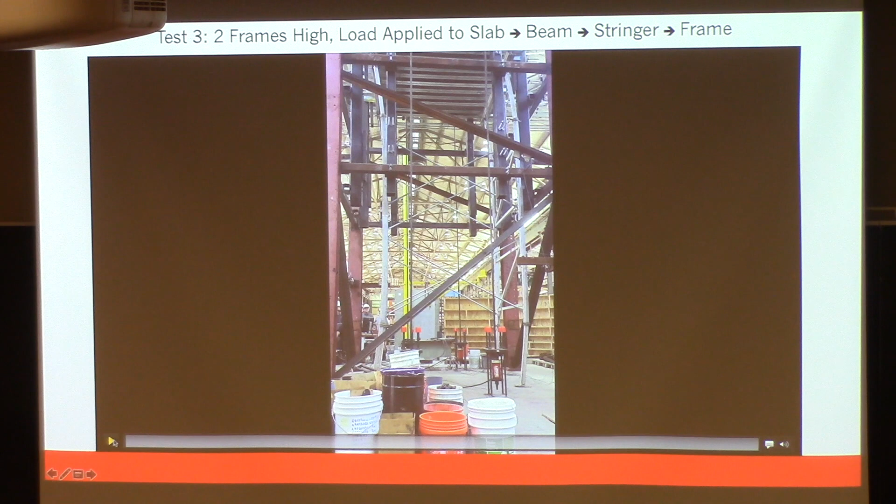So the other members, the stringers and beams by the design charts, they're never going to govern this design. It's going to be governed by these shoring towers. Now with the last test, we have a double stack frame. This one's not overly dramatic, like the last one. You can see it bowing. That's it. That's all that happened. You can see, of course, the bow in the tower leg.

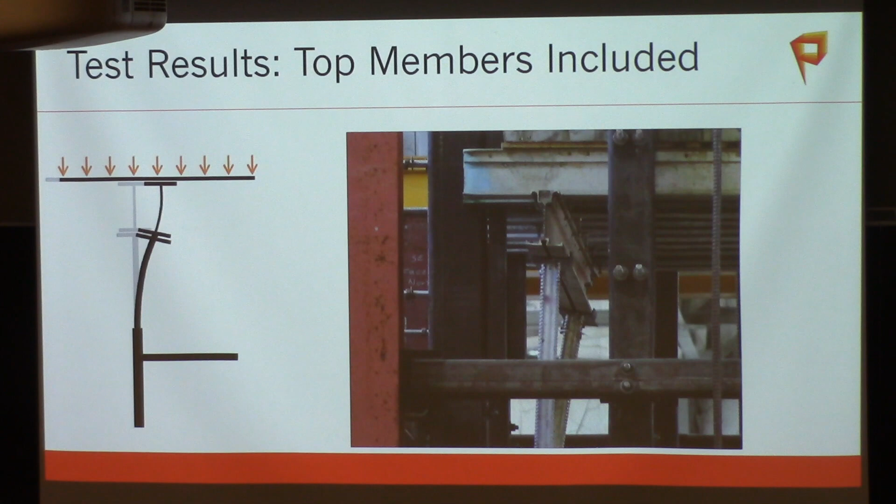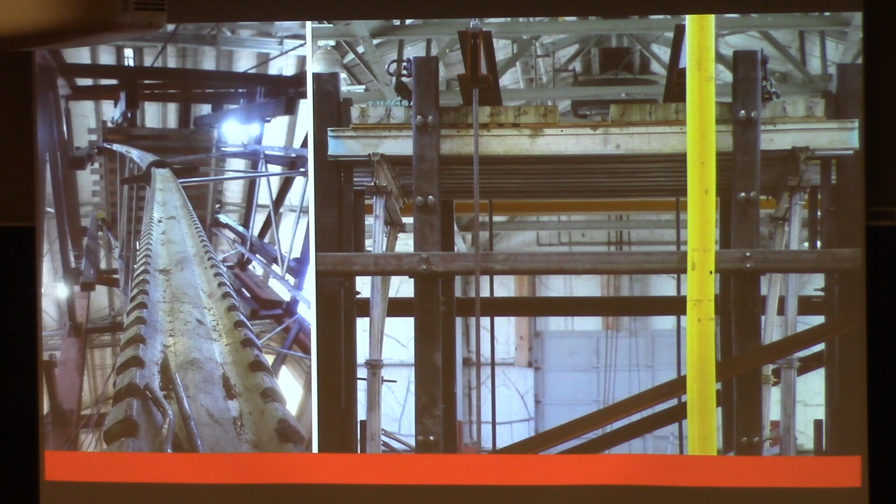And if we look at the results, compare what we showed pictorially, diagrammatically earlier, and you kind of look at how the stringer is leaning to one side or rotating to some degree from the axis. This picture here really gives you an idea of the curvature and the buckling that it's going through, and when we go back and look at the debris field, we didn't have a lot to see with the tangled mess, but you saw some posts that looked very similar to what we saw in those shoring towers.

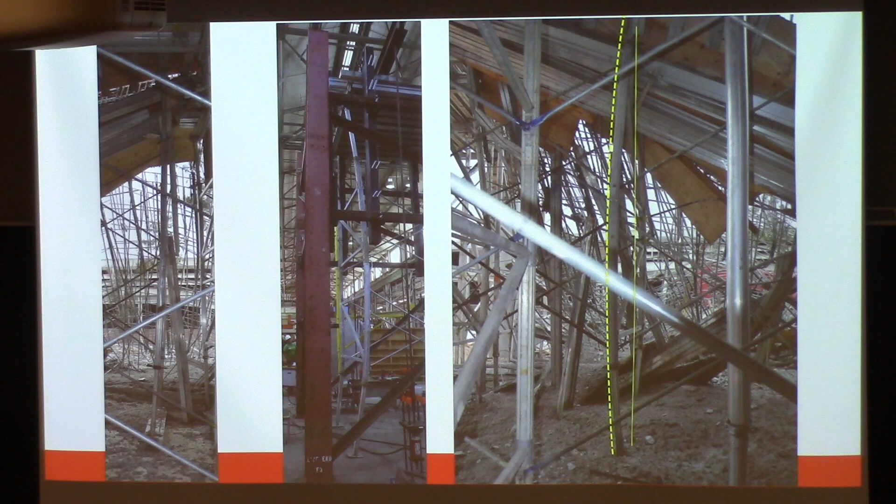And when we look at that one, there's still a further reduction. So remember, I said it wasn't shown on the design chart, but according to their manufacturer's data, it could go up to two levels of the shoring tower and not have any impact on the design chart. Well, we still got a further reduction, another 7%. And again, the other member design forces aren't going to control any of the design of these things.

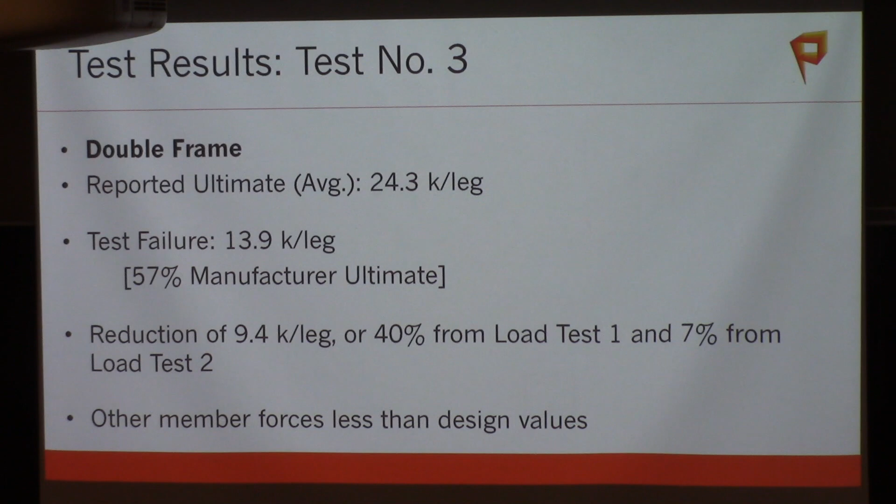So we have 40% reduction, another 7% reduction, and of course we look back at the safety factor 2.5, and all you engineers are going to tell me, well, why did it fail? It's not at 2.5 yet. Well, when you build things out in the field versus in the laboratory, there's a lot of other eccentricities. There's actually some sway that could happen. This was prevented from sway in this test. You actually could get a little bit of sway.

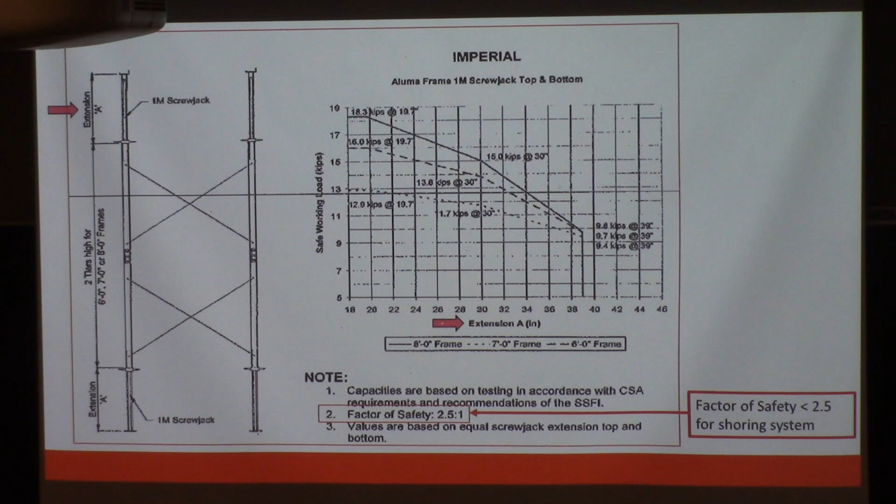That whole decking system could actually move laterally until the plywood engages into some of the columns. So the fact of the matter is what caused this failure was design charts. What happened on this day, they were pouring a 16-inch thick piece of concrete for the slab. That system probably had never been tested for that kind of load before.

And typically you're building 7-inch slabs, an 8-inch slab. This bus facility, the amount of load produced by those buses, of course, is quite heavy, much heavier than probably a truck loading. And so the design had never really been tested as a system. It had only been tested through those tower frames.

So the collapse delayed the contractor, as you can imagine, and we had to move through and design repairs. The load testing confirmed that the slab it collapsed on was fine, did not have to be repaired or removed at all. We only had to deal with the repairs of the collapsed slab. And what we found out as we started searching through the literature, this is a temporary structure which is not really governed by building codes.

Remember I said there's the Scaffolding, Shoring and Forming Institute. It's not a consensus-based organization. It's basically a trade organization, right? That's writing their own procedures for testing these things. And so that detail of having that stringer over the post was really what caused it.

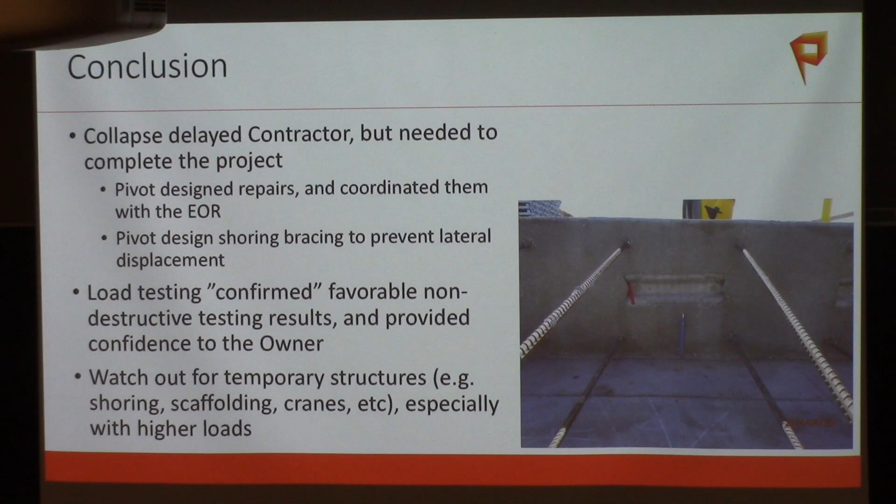I mean, these design charts are out there. This is what people are using. Engineers are using them for construction engineering, for designing the formwork, and it can be dangerous business, as you can imagine. So that's the completed facility, downtown Los Angeles, and thank you very much.